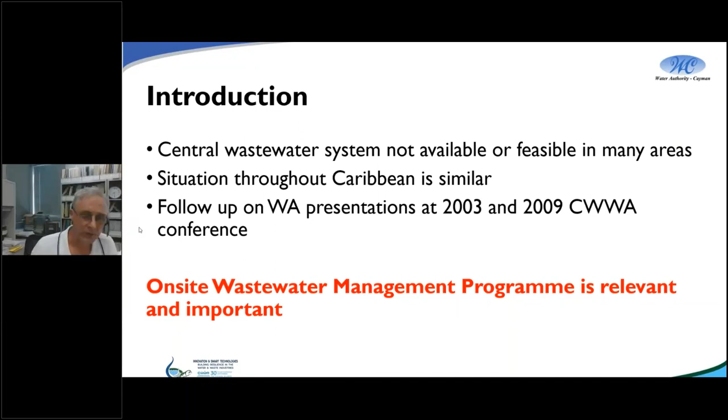That means we should treat it not as an afterthought in wastewater treatment, but we should really have a strategic approach to that. That is the purpose of this paper, to see and to share how the Water Authority has approached this. It also follows up on the presentations from my colleague Catherine Crabb in 2003 and 2009 at the same conference.

Let's talk a little bit about how it works in the Cayman Islands in terms of wastewater treatment. The Water Authority is operating under the Water Authority Act and the regulations. Among the tasks it has to fulfill, it is the regulator in respect of on-site wastewater collection, treatment, and disposal. So that is important. We have a legal mandate to fulfill this function. If you don't have the legal mandate, then it becomes a lot harder.

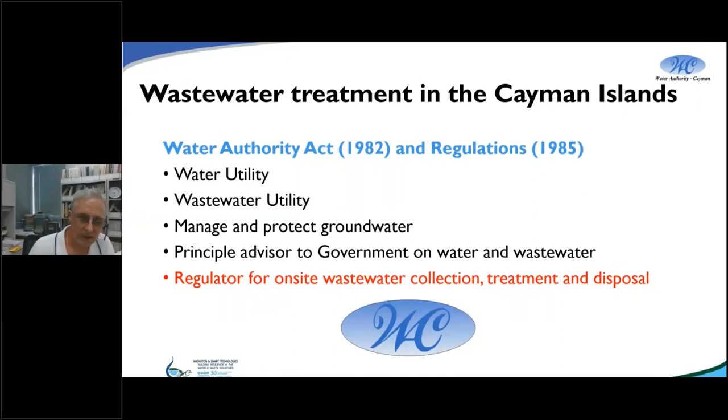That is the part we're not going to talk about today. I'm going to talk about the rest, because anywhere else in these islands, you have on-site treatment. That means a particular system that literally treats the wastewater at the site it is generated rather than transporting it to a central system.

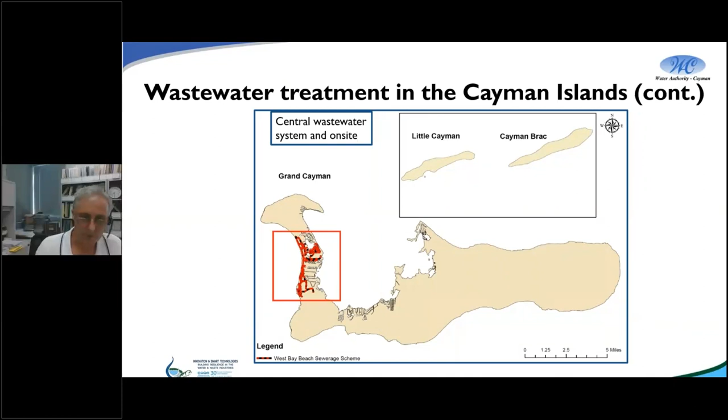So a couple of figures here. This is, I think, a fairly accurate estimate. We did that in December on request of PAHO, and it gives a bit of a feel of where the wastewater in the Cayman Islands goes.

First of all, keep in mind this country doesn't have much heavy industry or anything like that, so the vast majority of our wastewater is domestic in nature. About a quarter of that is collected and treated by the water authority at its wastewater treatment plant. That plant consistently meets our standard in the water authority regulations of 30 milligrams a liter BOD and 30 milligrams a liter TSS.

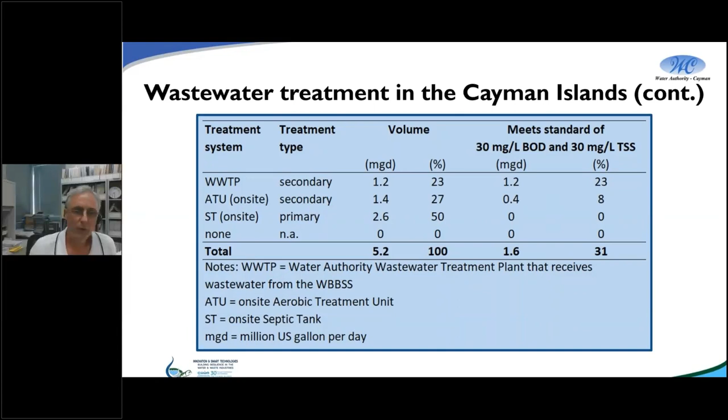I'll jump to the septic tanks for a second. That's about half of all wastewater generated in the Cayman Islands, treated through septic tanks. Septic tanks provide primary treatment and do not meet the effluent criteria of 30/30. We have ATUs, aerobic treatment units, or some people call them package plants. They do secondary treatment, and if operated properly, they do meet the particular standard. We figure that about a third of these ATUs meet those standards.

This is the heart of the paper and the presentation. I want to talk about the development of the on-site wastewater management program. The paper, if you read it, gives a better historical perspective, because this spans a period of about 40 years that we have been in this business.

But there's limited time for this presentation, so I mainly talk about the status quo, where we are now. As said before, the law and the regulations provide a framework for the water authority — why we do what we do. We have that mandate.

I'm going to talk in the next couple of slides about these different elements of the program. And all these elements fit together — they're not standalone, because they interact with each other. If you do one thing in one area, it affects something in some other area.

In the first place, if a new development comes in — and there's a lot of construction going on in the Cayman Islands, even during the pandemic — it goes through the planning process, and the water authority gets to review it. We first determine whether the development falls in the West Bay Beach sewerage area. If that is the case, it has to connect to that. Anywhere outside, we deal with on-site treatment.

If the development itself generates less than 1,800 gallons a day, they are allowed to install a septic tank. If it exceeds 1,800 gallons a day, then an aerobic treatment unit is required.

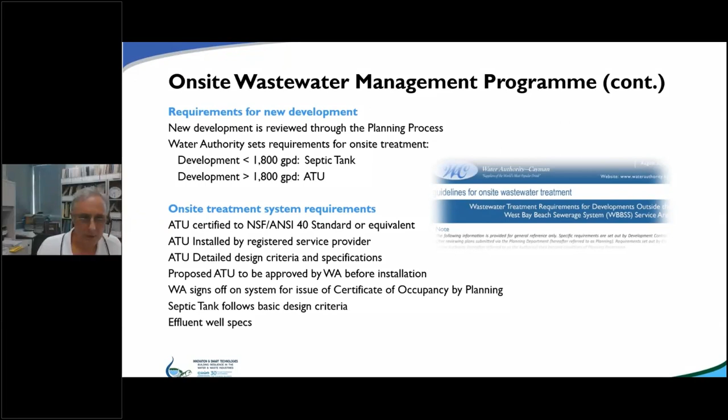At this stage, for septic tanks, we still have relatively basic design criteria, which haven't really changed much over the years, and we have fairly detailed effluent well specifications. I won't discuss this in detail because it will take too long this morning. What you have to keep in mind is that in the Cayman Islands, because it's a very low-lying island, it has karst terrain, and the way we dispose of effluent is through effluent wells.

So I touched upon registered service providers — those are the people in the Cayman Islands, or the companies actually, who do the installation and operation and management of ATUs. This is private sector, let's be clear about it. The Water Authority itself is not in the business of installing these systems. We are the regulator, right?

For such a business to become registered with the Water Authority, you need to have a certified technician on staff. The certification is done by the Water Authority itself. We have a very capable trainer in our midst, and he provides training on the wastewater treatment course.

These operators can follow the course, and once they complete it successfully, they need to sit an exam. If they pass, they get registered by the Water Authority. Every service provider needs at least one certified technician in their company before they can do business with the Water Authority, and among other things, they need to submit operation and maintenance records. This means a system of registering service providers that provides a level of quality control and consumer protection, because you can set a bar at this particular standard.

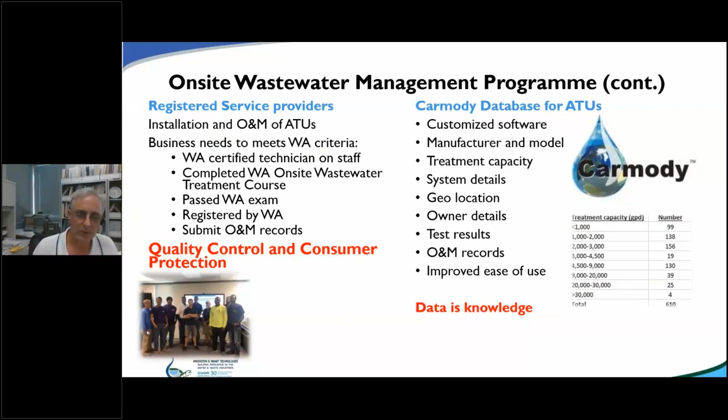Another important part of the program is our customized database, the Carmody system. It's customized software - we didn't invent it ourselves, it's from a supplier. There we keep track of all the ATUs installed in the Cayman Islands, and there is an enormous amount of detail in that. That gives you an incredibly powerful tool, and it sounds a bit cliche, but really and truly, data is knowledge. If you don't have that information readily available - and we're dealing at this point with 610 ATUs spread out over the Cayman Islands - you will be forever digging through spreadsheets looking for specific information. This database is very, very powerful.

Of course, the program naturally requires some level of inspections. Inspections are done when ATUs are installed, at critical points of the installation process, and then at the end point when they are approved for the certificate of occupancy. So you make sure the new system is working properly and everything is fine. Then, of course, afterwards - you made a good start, the system is working fine - but you need to ensure that over its lifespan it still operates properly.

So the Water Authority also does periodic inspections of ATUs. It's an area where we recognize we can make improvements. As a matter of fact, yesterday we had an interview for an on-site wastewater inspector who will be a new team member, and that person will focus on ongoing inspections because we need to strengthen that role.

Inspections also happen whenever we receive a complaint - it is never dealt with over the phone, like 'okay, this is not our problem.' It's standard procedure that one or two members of our team go out and find out what is going on, because these are mechanical systems and sometimes things go wrong and lead to overflows, things like that, and we go and check it out.

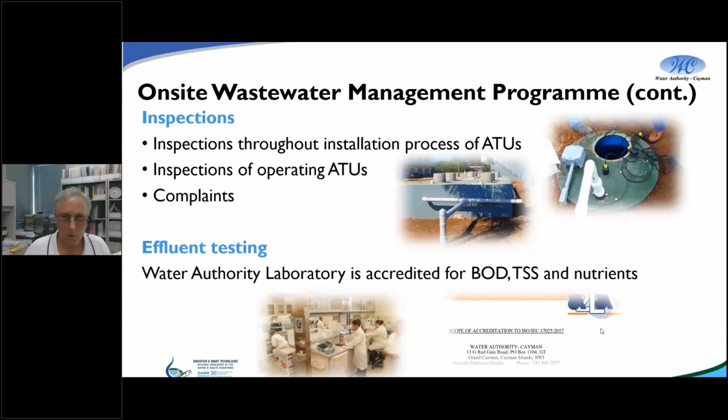Our program also has a very strong public outreach component. The Water Authority functions there as the regulator, but we've established a very, very good working relationship with service providers. There is day-to-day contact with many of these companies, and also with general customers in the field - developers, homeowners, anybody. They know to find us, they call us, and we provide them with information. It's a powerful tool.

The website of the Water Authority - I really invite you to have a look at that. It has a really incredible amount of information about the on-site wastewater management program. That is a result of many years of hard work.

In terms of staff, we have three - and will soon have four - designated staff. These are the people whose primary responsibility is to deal with the program. That's important, because if you deal with such a large proportion of the wastewater in on-site wastewater in the Cayman Islands, then we need to ensure that sufficient staffing and resources are available.

And the last point is that we also have the tool of enforcement through the Water Authority Act and the Public Health Act. I must say that is a cumbersome process, so if we can help it, we try not to let things go to enforcement when problems arise.

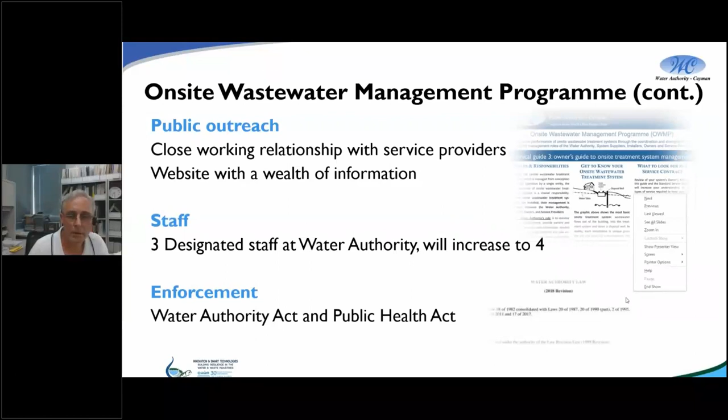Okay, next step, sorry.

Where we want to go next with the on-site wastewater management program, we need to ensure that we continue to develop it. What we're doing today is not good enough for what we do in 5, 10, 15 years down the line. So these are areas where we'll be looking.

I talked a little bit about when we allow a septic tank versus when we require an ATU, and we have to recognize septic tanks do not meet the 30/30 effluent standard. So we want to improve the rules for when we install an ATU so that we get more ATUs rather than septic tanks.

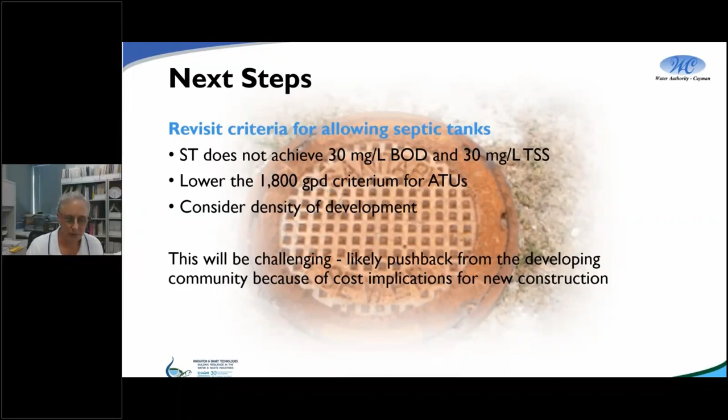ATUs were the subject of a paper presented in 2009 by my colleague at the conference. ATUs are capable of meeting the standards, but they have to be operated and maintained properly. We have made a lot of progress in that area, but we still see room for improvement.

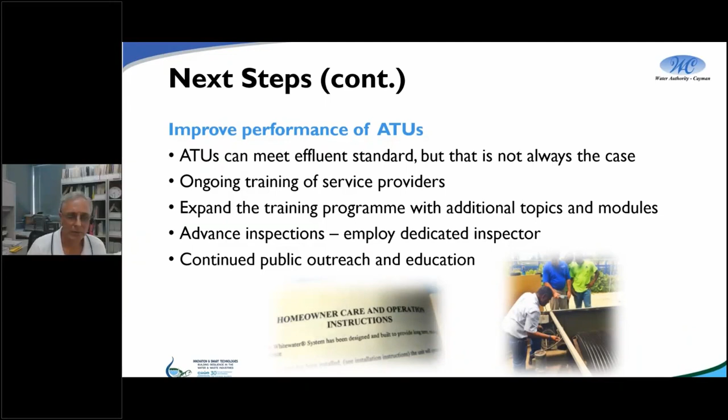So the training that we have now, we're going to improve by offering more training to deepen the program, so that service providers become more knowledgeable, more skillful, and can do that job better. As I mentioned, we are going to employ a dedicated inspector to help with extra data gathering in the field and knowing what is going on there. And we will continue the public outreach and education, a very important element of the program.

Other areas, which I think fall more into the climate change category, are all the issues shown here.

ATUs, some of them, use a fair amount of energy. Developers do not necessarily always consider that. So it's important that we educate the public that if they install these systems, they should also look at the energy use of the particular system, because there are systems with lower energy use versus those with higher energy use. Long term, that makes a big difference.

So we are going to promote this further in our program, encouraging developers. They have a choice of some systems as long as they're approved by the authority, but really and truly they should also look at the energy use of these systems.

Climate proofing is also important. All of us here in the Caribbean keep track of what is coming, and the predictions are getting more somber, so to speak. Our issue in the Cayman Islands is the rising sea levels. That means if you're on an island very close to mean sea level, we may be partially underwater in 50 to 80 years.

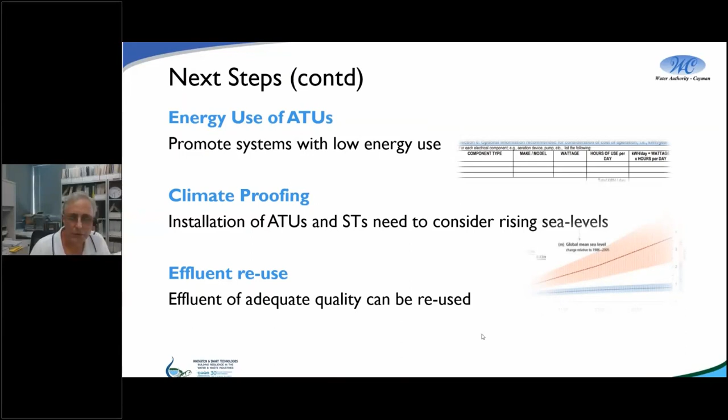Sorry, I'm having trouble with the slides advancing. Sorry.

My concluding remarks are this: the on-site wastewater management program is basically the result of what the Water Authority has been doing for a period of 40 years. It has improved over time, and it will continue to improve.

We will continue to look critically at what we achieve with the program, what we will not achieve with the program, and make adjustments and improvements to ensure that we keep focus on this area, because it's like where the whole presentation started.

A vast majority of wastewater in all these islands is not treated by central treatment plants, but is treated on site. So we need to continue to focus on this program.

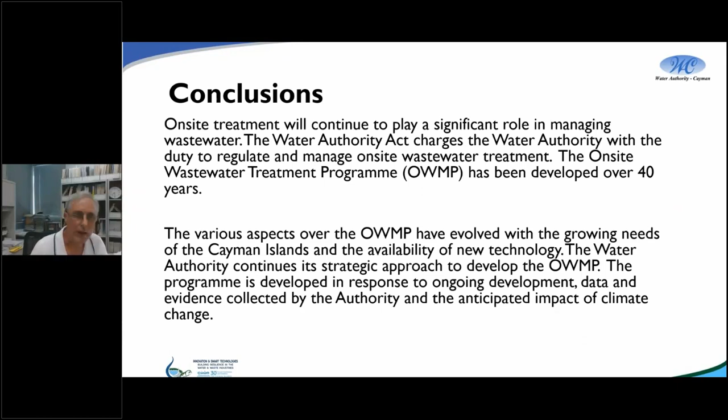This is my presentation. Thank you. And I think we can now move to the questions.

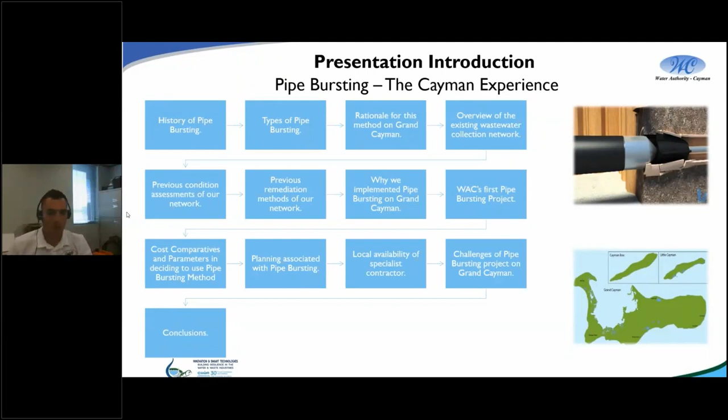Moving on to the history of pipe bursting. Pipe bursting was started in 1981 when contractors DJ Ryan and Sons Limited and British Gas successfully burst a cast iron gas main using a piercing tool in England. After months of research, development and field tests, Ryan and British Gas patented the method.

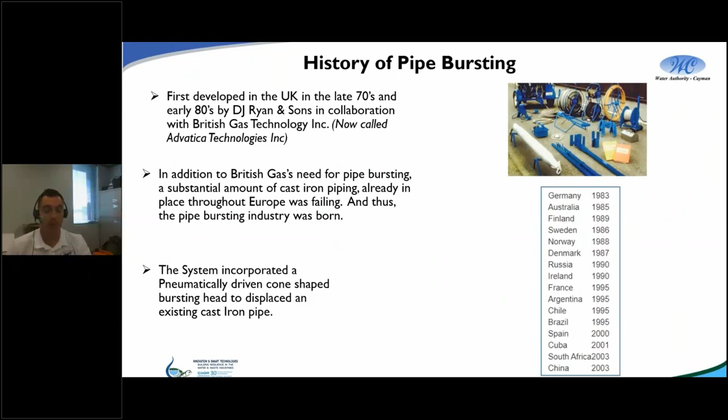On pipe bursting itself, there are three methods: pneumatic, hydraulic, and static pull. The main difference between them is the source of energy and the method of breaking the old pipe. Pneumatic and hydraulic methods use a dynamic force to break the old pipe, whereas static pull uses a constant pull force.

The expansion shell itself is important to note - it makes room for the following new pipe, and then you'll see the actual HDPE pipe at the end, which is common practice.

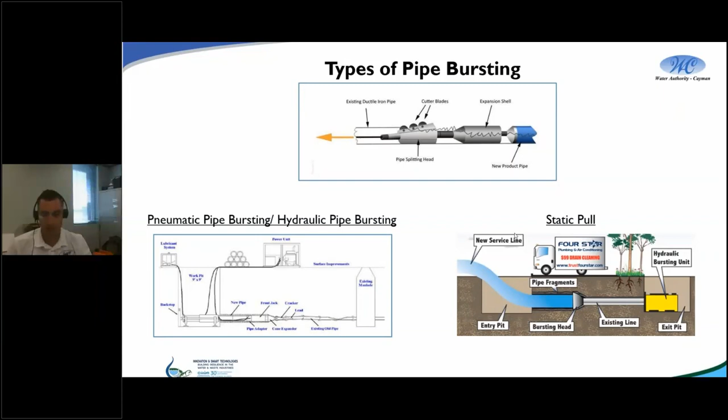From left to right: an aging collection system, pipe network expansion needed due to population growth, and pipe network expansion needed due to the increase in building and property developments on the island.

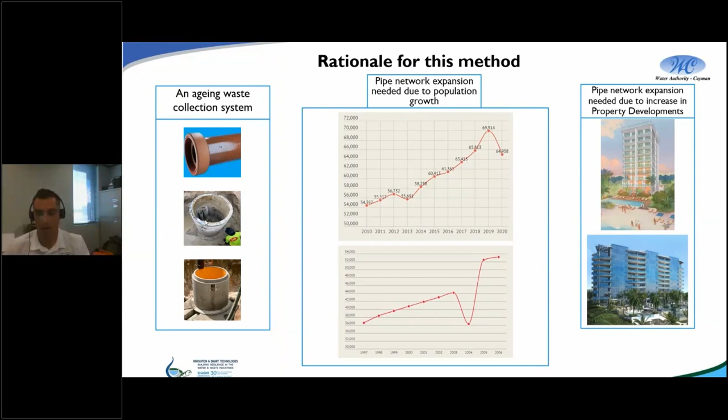Moving on to an overview of the existing network. Basically, like any other wastewater collection system, the waste flows from the various developments via gravity sewers, then onto lift stations, and ultimately the main pump stations. As part of our network, pump station 1 is the main pump station, located on the south of the network. From here, the waste is conveyed to the wastewater treatment plant, which is a sequence batch reactor. The reactor itself has a capacity of 2.5 million gallons per day.

I'd like to elaborate a little bit more about the material in our network, which is vitrified clay pipe. Vitrified clay pipe did at the time have its place in wastewater collection systems. It had the benefits of being inert, which makes it highly resistant to chemical degradation, and high longevity. If the pipe isn't damaged before it's installed, it has good structural integrity with regards to deflecting or flattening under loads.

That being said, in January 2020, Grand Cayman was subjected to a 7.7 magnitude earthquake, and from examining the pump run times in the days following the earthquake, a spike in pump run times could be seen, evident that the brittle clay pipes had fractured and allowed I&I, which brings us to the negatives of using clay pipes as a material for the collection system.

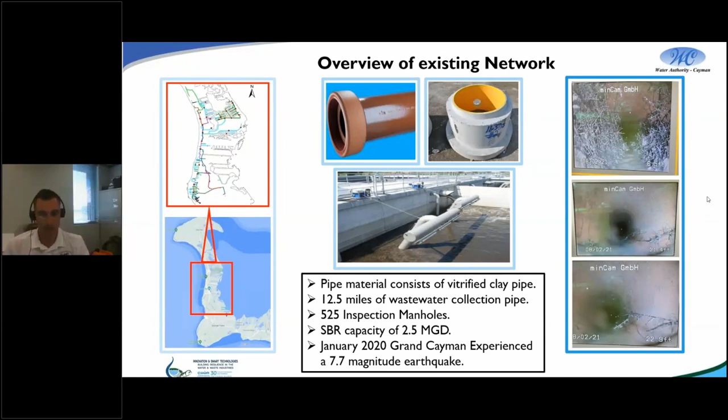Looking at the three images on the right, which were taken from our own existing network using CCTV, it's evident that clay pipes are susceptible to breakage and cracking, which then leads to root ingress, which further damages the pipe, and eventually replacement is needed. So that summarizes the existing network.

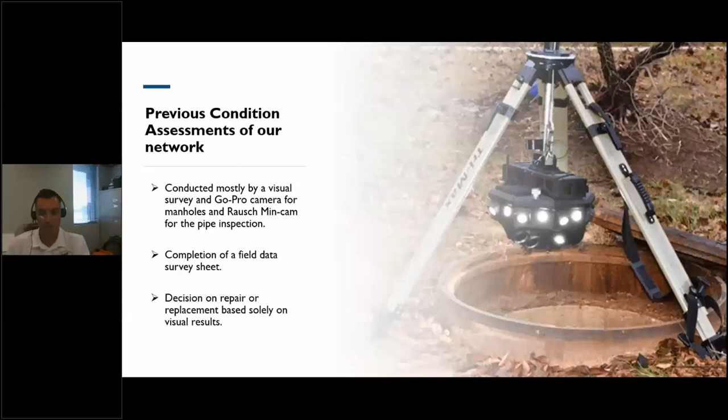Some previous remediation methods of our network. Before we dive into the type of remediation methods that took place over the years on Grand Cayman, we'll firstly examine why remediation needs to happen.

Basically, in sanitary sewers, splashing and turbulence happens where pressurized flow discharges to gravity pipes, releasing hydrogen sulfide into the air, or H2S gas. Where hydrogen sulfide exists in sanitary sewers, bacteria feeds on hydrogen sulfide and excretes sulfuric acid. This sulfuric acid then quickly corrodes the concrete of the manholes and of our pump stations, and the corrosion is specifically damaging to the unlined manholes.

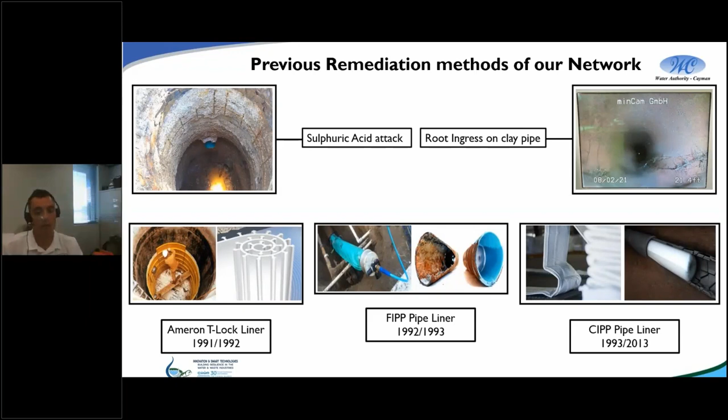So, following on from remediation methods, I'd like to give a quick overview of the further remediation methods we now currently use as part of network rehabilitation: HDPE pipe installation for clay pipe replacement, and AGRULINE precast concrete manholes. These methods now take precedence in maintaining and rehabilitating the network. Installation of manholes is now quicker and has a longer lifespan using this product. It's important to say that on the HDPE installation side, the material is extremely versatile and meets all the requirements for wastewater lines and sewer pipes.

So why did we implement pipe bursting on Grand Cayman? Well, the FIPP method of relining pipes produced just over a 98% success rate, with only 2 of 107 sections actually re-inverting—essentially meaning the pipe lining material had failed, ultimately leading to a collapse in the material and therefore a blockage in the line.

A similar situation in 2013 was observed whereby the CIPP method of relining also failed, again causing the liner to collapse and causing a blockage. The remedial methods of repairing these issues, coupled with a slight conflict between the Water Authority and the chosen contractor, ultimately led to the Water Authority having to excavate these areas and relay new pipe. So in essence, the method that was meant to rehabilitate the network using FIPP and CIPP ended up becoming the method causing the blockage problems in the area.

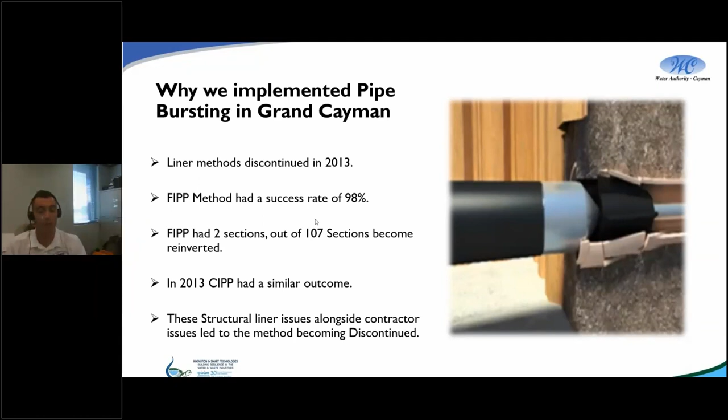The observations and conclusions of the Water Authority indicated that the most common vulnerabilities of the epoxy lining systems are associated with planning and quality of preparation, as well as the training of the applicator personnel performing the installation. Short of 100% video documentation, there's little or no way of knowing with complete certainty how well the pipes were cleaned and prepared for the epoxy application, which directly correlates with whether the epoxy adheres properly to the inside of the pipe, or if an adequate coating was blown into the piping system.

So moving on then, the Water Authority Cayman's first pipe bursting project in Grand Cayman. Water Authority Cayman first implemented the use of pipe bursting on the 27th of February 2019. The location was Lawrence Boulevard, roughly the middle part of the network on West Bay Road. The burst was conducted between manholes 2401 and 2478A, consisting of 200 feet of 8-inch vitrified clay pipe, replaced with 10-inch HDPE butt fuse pipe. The clay pipe had collapsed between the two manholes, and due to its collapsed nature, the lining technology wasn't an option.

The image in the slide shows the location of Grand Cayman's first pipe bursting project. The main takeaway is that Lawrence Boulevard is a heavily trafficked area, and that's the essence of pipe bursting: rehabilitating pipe in a heavily trafficked zone with minimal disruption to traffic and residents and minimal disturbance to the ground. As far as excavation is concerned, it's only entry and exit pits that are needed. In this case, the manholes also needed replacement, so essentially we killed two birds with one stone - the pipe was replaced and the manhole excavation acted as entry and exit pits while being replaced at the same time.

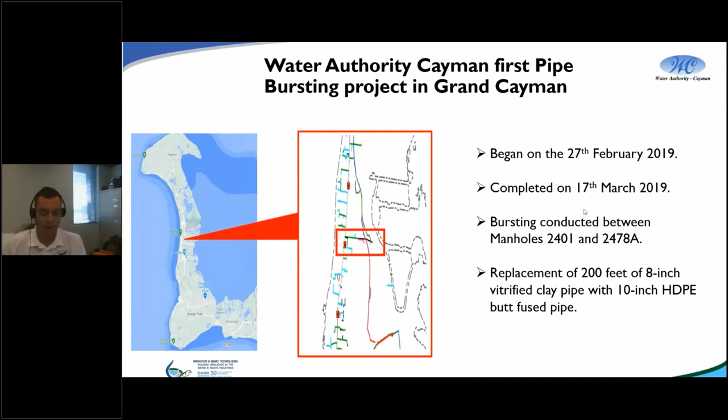So moving on then to pipe bursting versus traditional methods. This slide is entitled Cost Comparatives and Parameters, and this was an actual cost comparative study done when deciding - granted it's a summarized version - but this was the actual comparative study done when deciding to use pipe bursting on Grand Cayman. Care was taken at the time to meticulously go through in detail the different options based on cost and also the practicalities of using pipe bursting versus traditional methods.

Some factors to consider at the time are outlined in the slide above. You'll notice each method is listed with a cost concern attached to it. Let's first look at the traditional method on the left, the open cut and repair method. I'm not going to go through it word for word, but you'll notice that in terms of workload it has the most items attached to it regarding cost. The cost itself has a large number of items attached as well when compared to pipelining. Based off previous projects, pipelining wasn't even considered.

In regards to costings of pipe bursting versus traditional methods, it's important to state that there are a number of additional costs to consider when making repairs to a pipe. For example, traditional trenching repairs don't always include the cost of excavation of the old pipes. Trenching costs far more if the job is especially complicated, and in some cases it may even require another contractor to perform the work. Also, any large heavy objects located near or over the sewer pipes or the collection system may incur separate charges for relocating them before and after the work's complete.

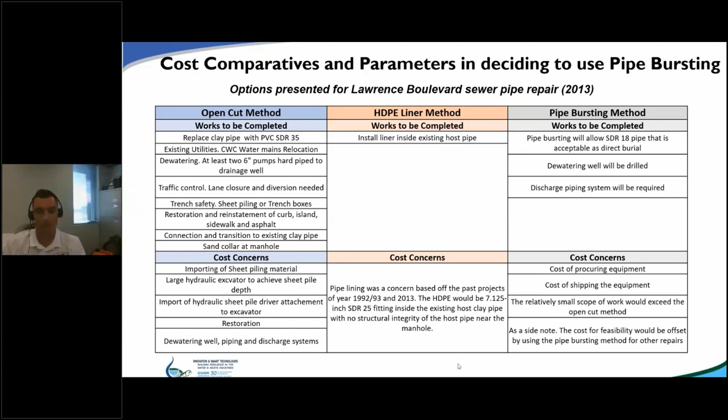There's no need to rip up landscape and sidewalks, resulting in less disruption to business. So on the planning side associated with pipe bursting, you'll see the planning process on the slide now.

The Water Authority follows a particular flow of work in relation to pipe bursting on Cayman. Carrying out the work is one thing, but it's the planning involved that allows the actual pipe bursting to be conducted. As we are working on behalf of the public, it's important to keep them informed of possible disruptions, which avoids complaints and makes them aware of the works being conducted.

Firstly, host pipe examination, which is done by CCTV. This allows us to see the condition of the pipe. The reason for this is that using pipe bursting, pilot rods need to be fed through the existing, for example, clay pipe, and that's what's used to pull back the HDPE pipe.

Next is a survey of the existing pipes and underground structures. In almost all cases we encounter other services and utilities in the proximity of our operations, so it's paramount that we don't interfere with them, which could cause huge disruption to fibre optics or water. The last thing we need is to burst through a fibre optic cable or a water pipe—that's not good news for anyone.

Also, when conducting pipe bursting, customers need to be notified that works may encroach on their property, especially in the case of drilling drainage wells. Due to Cayman's high water table, we need to dispose of groundwater during entry and exit pit excavations, so wells sometimes need to be drilled close to or on the proximity of the owner's boundary.

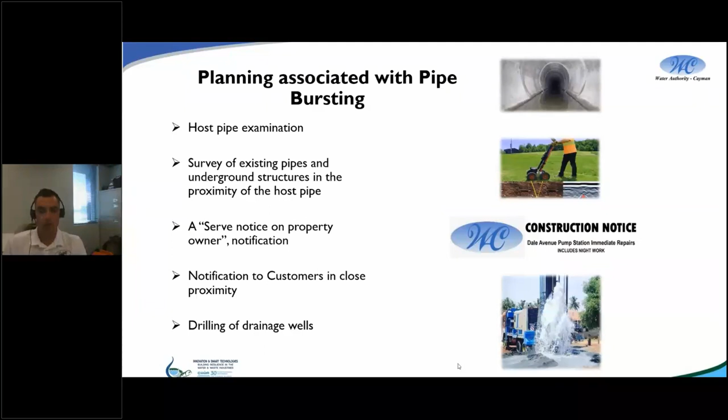Moving on, we have the local availability of a contractor. Outside of general building and structural concrete works, there really is no contractor that specialises in pipe bursting or trenchless technologies on Grand Cayman. These tend to be specialised methods of pipe replacement, and contractors who use them tend to be somewhat experts in the field. With that being said, Sandpick Contracting Cayman Limited is the chosen contractor we use to conduct our pipe bursting operations.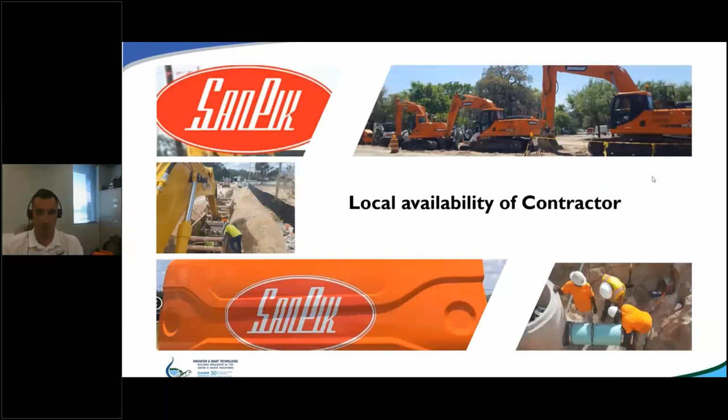Challenges faced during pipe bursting on Grand Cayman. Moving to the next slide, you can see a few points. I suppose the main challenge, outside of locate requests, health and safety, traffic management, and general organising, and the one that greatly affects the time and efficiency of a project on Grand Cayman, is the groundwater itself.

Most aspects of pipe bursting projects can be planned for. Groundwater, however, cannot. All pipe bursting projects conducted so far on Grand Cayman and in the Water Authority Cayman's network have run successfully—meaning they were completed, but not without the difficulties of fighting the intrusion of groundwater during localised excavation.

As the Water Authority's main sewer network is located mostly below the water table, coupled with the fact that the region is mostly made of coralline limestone and jointing karst formation, most pipe bursting projects encounter fissures that allow high flow rates of water.

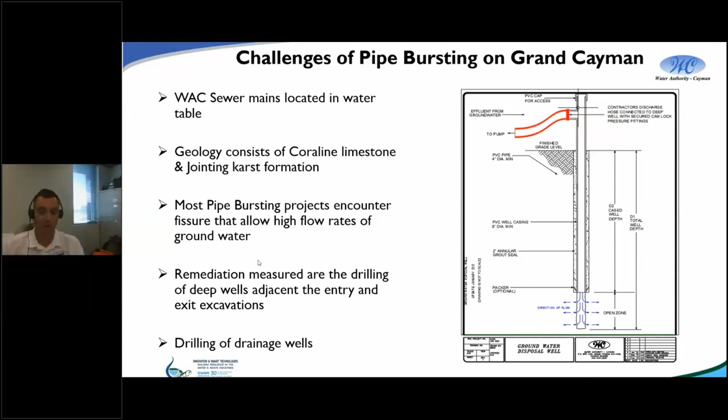At the very top in red, that's a pump hose essentially, and these discharge pump hoses are hard piped directly to the deep well. The water is disposed of by forcing it into the deep well, where it then moves laterally through the open zone, denoted at the bottom of the screen.

Some key points we've looked at would be the existing network, previous condition assessments, previous remediation methods, alternative trenchless technologies, and cost comparatives of traditional versus pipe bursting. Making a viable case for pipe bursting as a trenchless technology for use here in Grand Cayman was a relatively easy one, because the Water Authority has examined all the other methods of pipe replacement, and pipe bursting itself as a method has proven itself to be the most efficient and the method by which collateral damage to the surrounding environment is kept to a minimum.

Like with any civil engineering task, the method of improving Cayman's wastewater collection system does not come without its challenges and hard work. Finally, I'd like to leave with this quote from Michio Kaku, which I feel is applicable to us here at Engineering Services: what we usually consider as impossible are simply engineering problems, and there is no law of physics preventing them.

Definitely applicable in relation to pipe bursting here on Grand Cayman. That concludes the presentation, and thank you for your time.